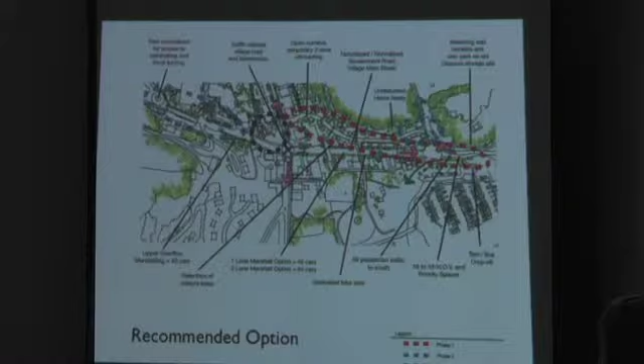So this was the recommended option, which included most of the ferry marshalling up here, and that very small road through the back way, which we actually mapped out through the trees and figured out where it would go so that essentially it wouldn't look any different than it would today.

We did a parking plan which looked at a variety of areas, including sites like where the buses are and where the new community center is for parking areas, so that people would walk on the ferry or walk to the cove.

And even things like this, when we were looking at creative ways to find where to put cars - this is Dorman Road, this is the sewage treatment area. There's actually an old logging cut through here.

If you walk through there, that's been bulldozed. There's a roadbed already there. What we were looking at is actually just between the trees, allowing for parking in there, which on event days and things would be quite convenient as well.

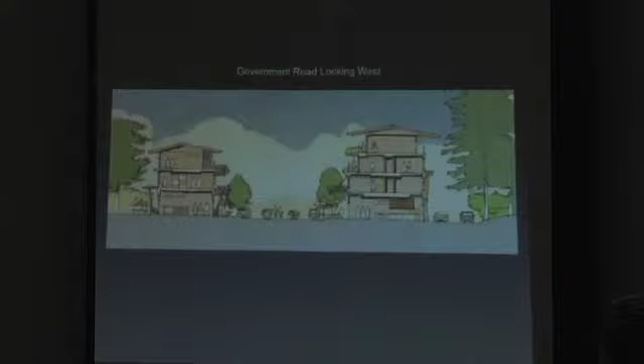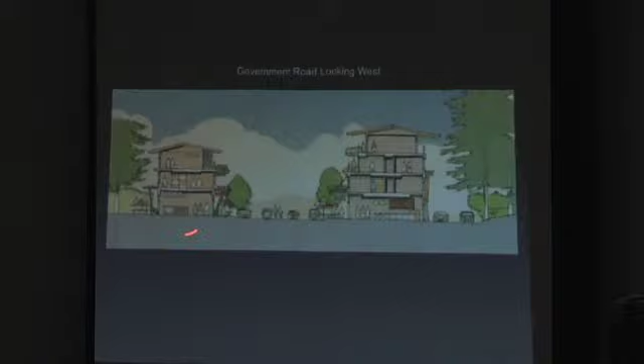So we did a number of sections and studies of the building types. This is a section looking west from Government Road, looking at the buildings stepping back, 3 stories as they are today on the south side of Government Road, and 4 stories on the north.

Here's that road at the back that nudges into the park. It didn't take down any mature trees, by the way.

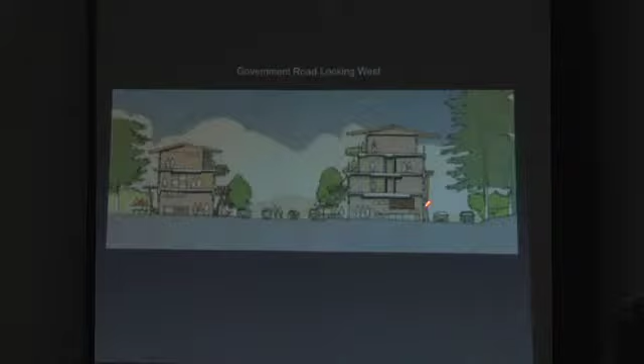It also allows for, if we don't need this much traffic at any time, this is a very useful service road for the backs of these buildings. So that servicing of the buildings can happen from the rear.

We looked at other small towns like Nelson that do a lot of great things. We looked at making the roads that we build pervious so that they're actually part of the greenscape. They're not a sea of asphalt. We looked at bikes, scooters, sorts of things.

The pedestrian first environment - these are the final plans that we created, basically showing a lot of green because we wanted to indicate that what we were doing was simply using existing building sites and going vertical, trying to save a lot of the green space. This was a rendering we did of Government Road looking down towards the ferry.

That would be the gas station site on the left and a couple of other developments. Again, just building on the original idea of those fingers where the densification would go - potential growth areas through time.

And we ended up having what we call 5 precincts to the cove: the Civic Precinct, the Upper Cove Precinct that included Artisan Square, the Hilltop Residential Precinct, the Village Center Precinct, and then basically the Parkland area to the north.

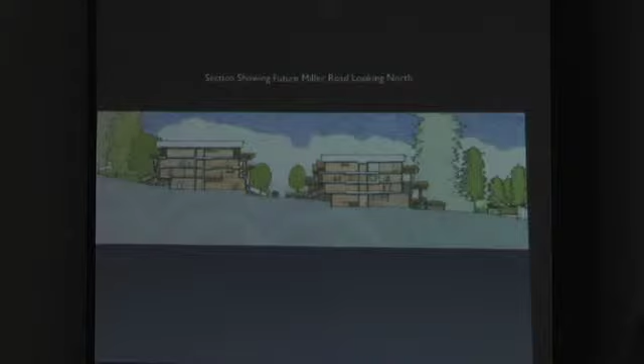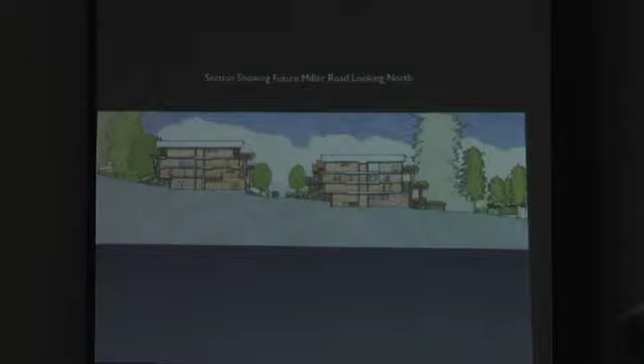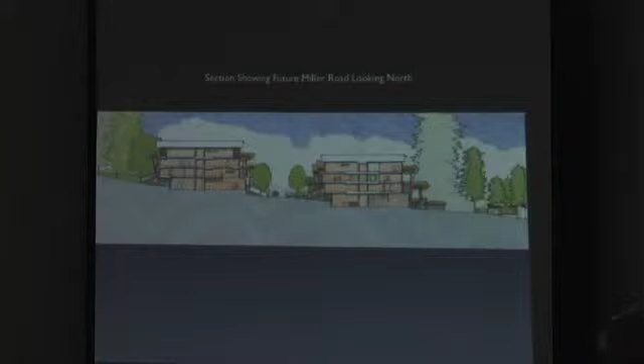Even though it probably doesn't make a lot of sense, right? What's there now? Does it make sense to develop the cottages or redevelop the cottages? No, economically, I don't think it makes any sense. I'm not even sure - how many people that live here wander through the cottages, right? It's not something I do. It's just not part of the fabric of the place. So I think it does need attention.

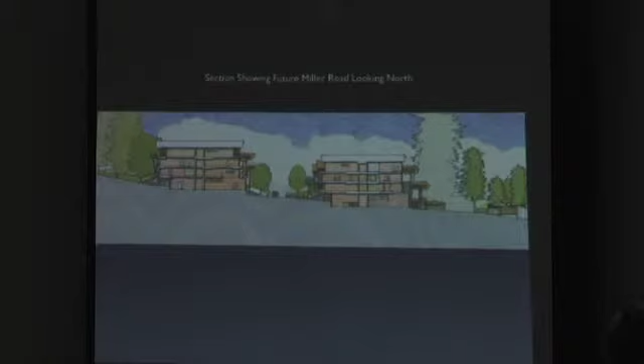We did some other sections. This is looking north through Miller Road and the buildings that would address that. We did a final version including all the programming for the civic facilities, a public space in between the two buildings, the civic porch that I talked about, and the connections to the pedestrian areas, that sort of thing.

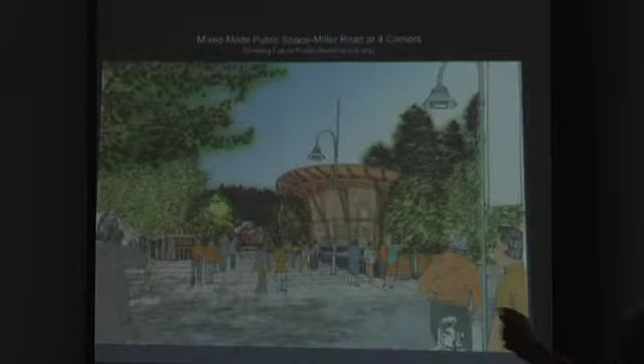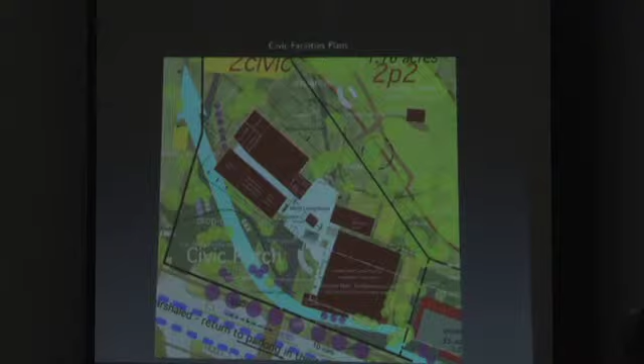Sorry Alan, can you go back? That little orange and gray one down at the bottom was one of the alternative sites where the municipal hall could go, with mixed-use residential up above - in this scheme it was mixed use. At the Four Corners site, here's the new city hall and library that we were looking at. The city hall would be on the left, and that was the library potentially.

Sustainability - we looked at the final build out in 25 years of structures, and ferry marshalling. So I just wanted to quickly show this slide, sorry it's a bit blurry. This is the Lower Cove, that's the existing library, the new square we proposed.

This final development also included development of Rondi's parking lot so that it actually had buildings facing the street - something Rondi, by the way, has sketched by himself many times, he has thought about this - and buildings facing the marina as well. So there is a development of that site.

That was it. And at the time, the municipal government paid for a study after we had completed this from a transportation engineer that never consulted us, and they showed this road as a typical Ministry of Highways road that was bermed up with ditches and bulldozed right through the park, and everybody said, wow, it's this massive road. We never contemplated it as that - we contemplated it as a green paved road that was fit in between the trees and allowed the traffic. Now, there is some damage to the park.

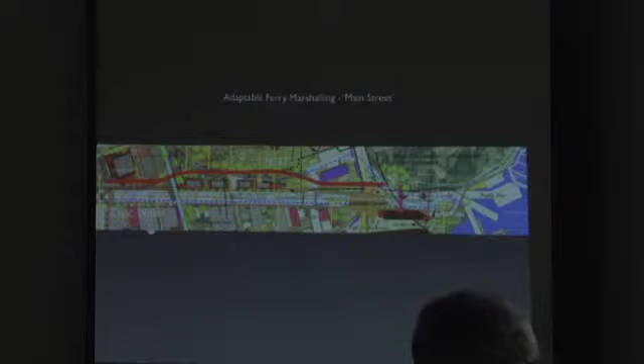I'm not saying there was none, but it was nothing like the study that was undertaken that killed this idea. It was all to do with cutting a little bit of blasting and removal of a rock knoll and a few trees that were there. Right at this point behind the gas station, there would be a little bit of blasting.

This shows the pathway of traffic from the ferry through the backside. It's important because a lot of the trucks that come off the ferry initially wait or have to find a way to turn around and service the businesses in the Lower Cove. This allowed them to go up with a new roundabout in front of the school, with the proper turning radius for larger vehicles to go up to that point and come back down to the cove. So all types of traffic were thought of at the time.

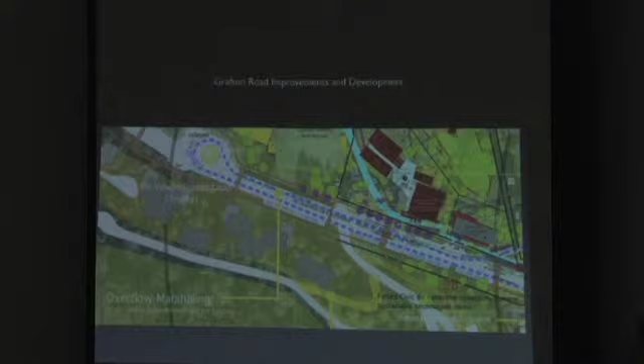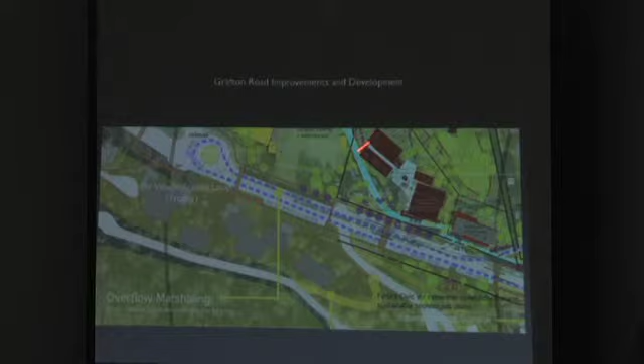Would you continue to have the traffic going onto the ferry coming down Government Road? Yes, but we stacked most of it up here at the top, so that at the bottom it was single lane. The other thing we did, at the bottom we allowed for special stacking of cars. They were primary spots, so there was one through lane and one stacking lane. And the through lane allowed for electric vehicles, smart cars, or motorcycles — things we wanted to give primacy to on the ferry to get primary loading at the bottom.

Did ferries— I know we had a meeting with ferries in your office, but I can't remember what their comments were on this plan. At the time, they were very supportive. I've always heard they didn't seem to like this double stacking up above Government, up above Miller's, that they like to be able to see it, which means it has to be down lower. That's true, they did point that out, and this plan allows for that to happen as well. But our feeling from the island point of view was that we'd rather stack the cars at the top.

I just have a question about this. I see a village as more pedestrian oriented, with trucks and cars running up and down once an hour. It seems to me that that's not pedestrian oriented anymore. Yeah, that's what we try to do.

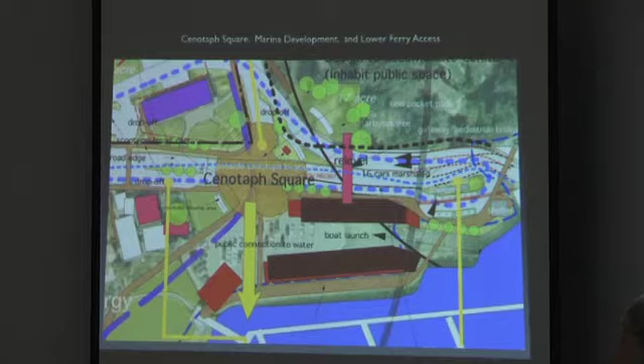One of the other things, just so everybody knows, we had a negotiation with the then GVRD behind the scenes at the time. At the time I wasn't allowed to talk about this a lot, but I'm sure this many years later we are. They would have gladly given us some of the land in various parts of Crippen Park in exchange for other pieces of land further on the island that they felt were more truly park-like. They would have given the municipality the land.

We also, by the way, here's the Chevron site, which has some toxicity to it — I don't know how many of you know that. This was an old storage area for gas. We met with Chevron as well, and under the right circumstances, they were willing to remediate that site for us at no cost to the municipality. Part of what we looked at was actually clipping off the corner of that site to allow those cars to go through the corner.

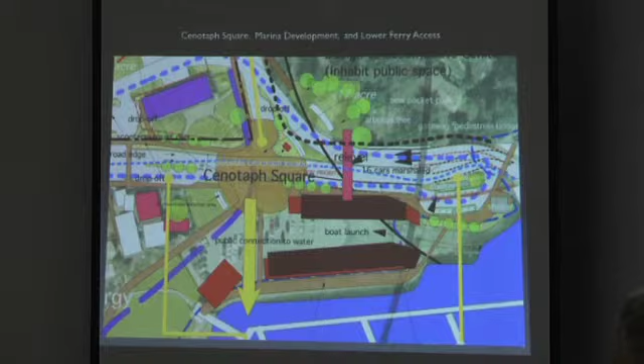So we tried to talk to everybody we could at the time. So here's your answer to the municipal hall. Here's the Ruddy Potato and the old pub and the old gas station. That's where we put the municipal hall, and you can see the smaller red areas were meant to be cafes or some street-facing commercial. This site also allowed for the potential of a mixed-use commercial at grade residential building behind it, which may or may not have been part of the economics of the municipal hall. And the future library would have been across the street.

So we made a civic square here that, in this scheme, envisioned the paving to be brought right through, so that again, that was a pedestrian focused area. The reason it could be a pedestrian focused area is because the traffic was sent around it, not within it. So there'd be very little traffic that actually had to go through there.

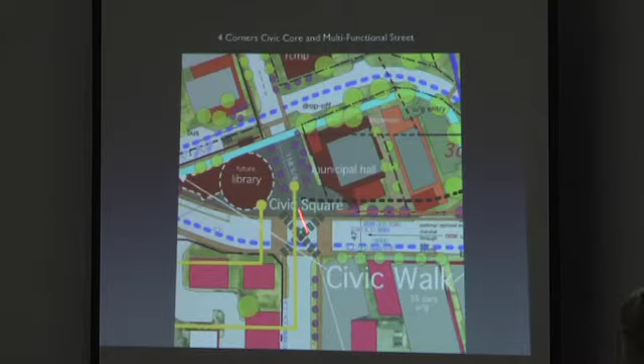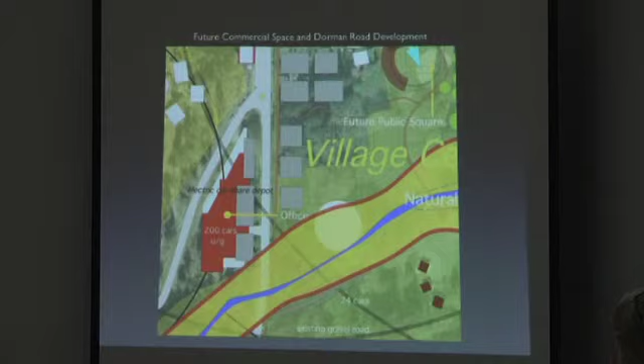Just other opportunity sites around the village. Surplus lands and looking at development within those. And we actually began to go as far, this is the elementary school and the proposed site for the community center. We actually parceled all the land in the surplus lands into potential parcels as well. We obviously didn't take it to land titles, but we did that as well.

Park space, including park space behind the school. This is the Abbey Field area here. So this became part of the pedestrian pathway. There's already, or was, a pathway through there. It's being messed with a little bit.

Alan, on the back of that numbered lot, was there any mixed-use residential behind the school? No, this was all preserved as green space, 5 acres of green space.

We looked at heron nesting sites, which we all know of. There's also some out here on occasion.

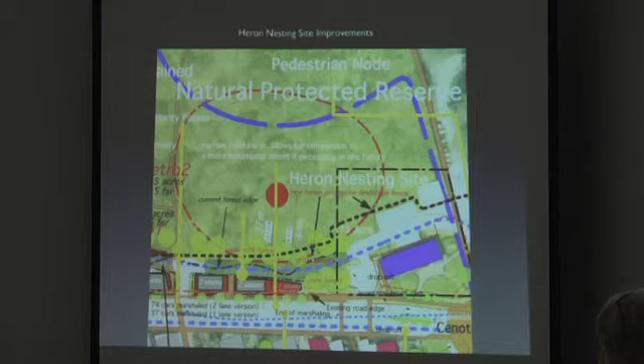And in the form of development here, in consultation with everybody that was involved at the time, we actually stepped these buildings on the other side of Government Road. So this is a 1-story building here, a 2-story, a 3-story, 4-story. So we respected that area by just bringing the buildings up very slowly in scale.

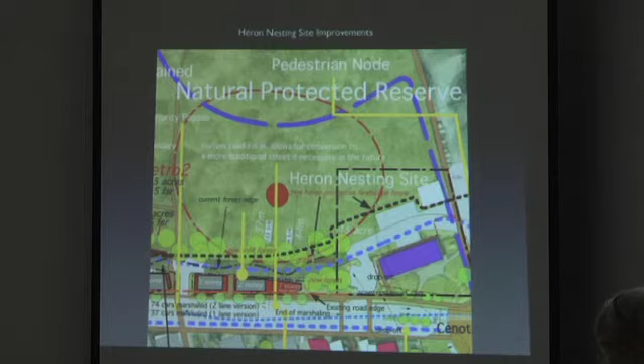That was that main pedestrian spine through the heart of the cove. And just zooming in on that, this is the civic precinct, the community center area. You can see how closely linked those were by that pedestrian path, right to the ballpark and the potential civic square.

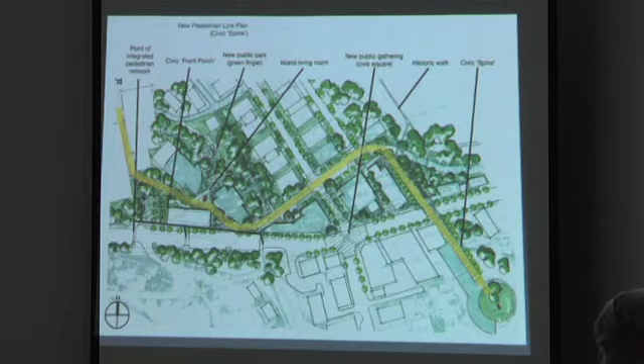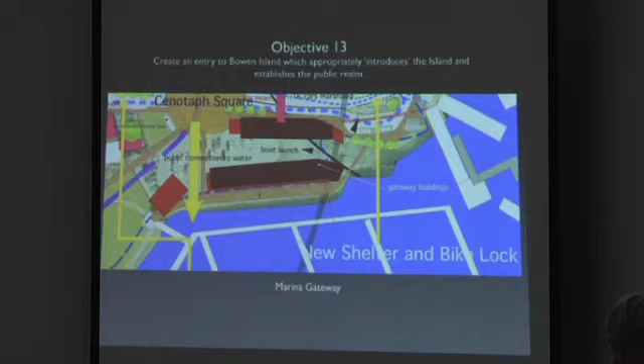That was just a zoom in on Ronnie's parking lot site and how to develop that. We actually felt this was pretty important because this is part of what you see as you arrive at the island. We think this is an important place to have a presentation of activity in buildings.

So the reason we did this was just to illustrate to people this was not a radical thing. It was simply fitting things into the existing context. And that's the stepping buildings.

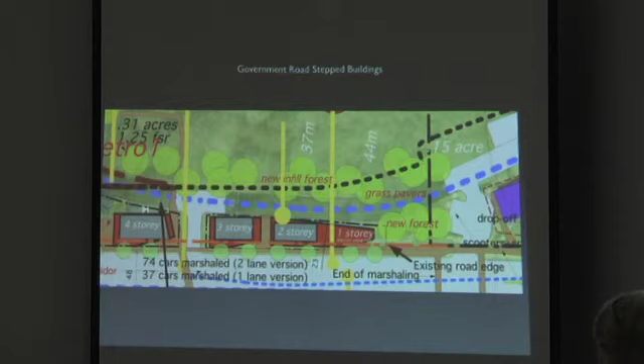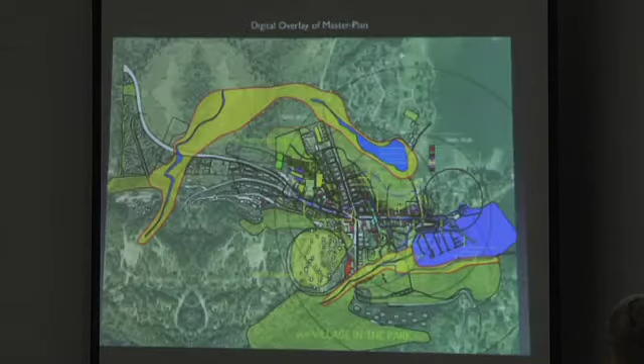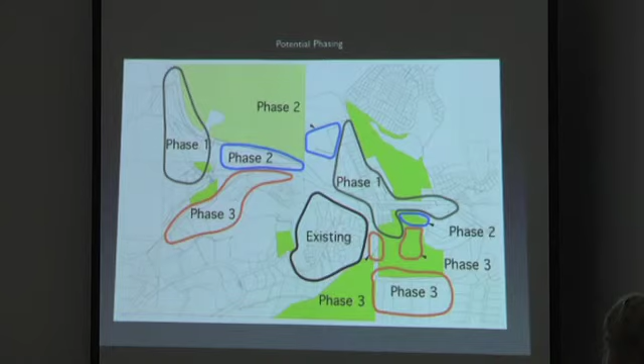And this was a major master plan which needs a bigger piece. We looked at phasing of development and where the likely sites were, including the surplus land sites. That's all in the report.

We looked at unit counts that were based on different density than the zoning we have on Bowen now. Basically we looked at density per site.

And areas that would be zoned for commercial use. Unit counts we did just as a part of the report. I won't bore you with those that are in there, but they're not radical. We're looking at 70 to 120 units at full build out of the lower cove.